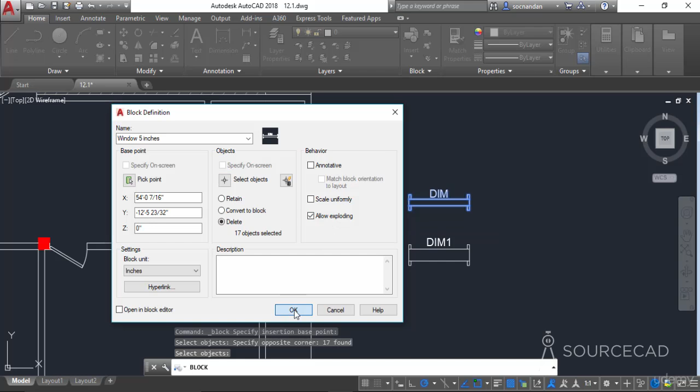Also here I'll make sure that this delete radio button is checked, because I don't want this attribute to be at this place. I want it to be removed, and I'll keep all these values at their default: annotative unchecked, scale uniformly unchecked, and allow exploding checked. Now click on OK, and we don't have that geometry anymore, but we have its copy here in this insert. So we have it added.

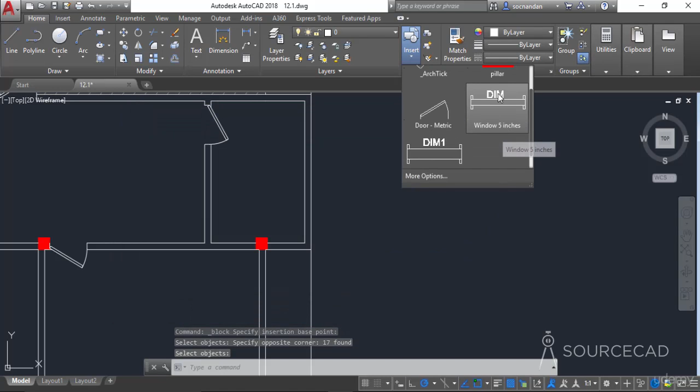Let's repeat the process for this second geometry as well. So I'll go to this create block, give it a name. So let's name it as window 10 inches. Now click on pick points and click on this pick point. Now select objects, select all of these objects, and now click on OK. So we have both of these blocks added here, the dim and dim 1, or the 5 inches and 10 inches block.

Now we'll insert both the windows in this drawing, and we have two different wall thicknesses. The first one here, the interior walls are of 5 inches and the exterior are of 10 inches. Now in order to add the windows, I'll go to this insert and I'll select the 5 inches block. Now here we have this block. Let's insert it at this point.

And as soon as you insert that block, you'll notice this edit attributes window. So that's the difference between a normal block and a block which has attributes. And here we have the prompt, enter window size and the default values, which we can change. So now we need to enter the size of this window, which we'll enter as the width by length. So let's enter 5 inches by 4 feet. So that's the dimension of this window. Click on OK. And we have that value here.

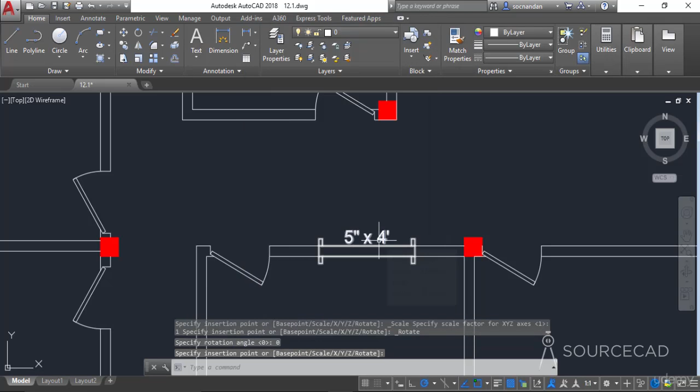Now let's repeat the process for another window here. So I'll click on this insert, select the 5 inches window, and this time I'll select this point, and now once again change its value. So I'll type 5 inches by 3 feet and click on OK. So in this way, the single block can be used to enter different values using attributes.

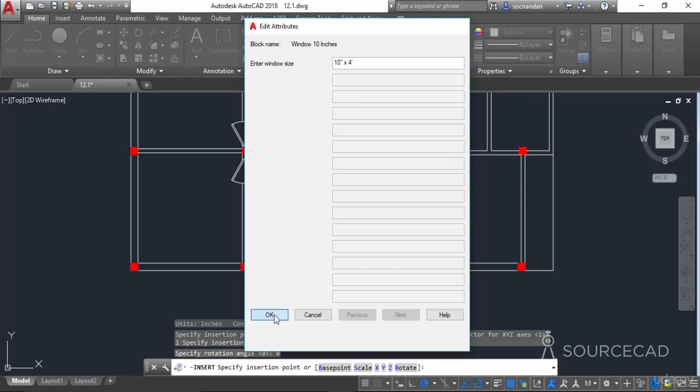Similarly, you can insert the second block also. So I'll select this 10 inches window and I'll insert it somewhere over here. And once again, I'll enter the value. So I'll type 10 inches by 4 feet. And now click on OK. And here we have it. In a similar way, you can add as many windows as you want in this drawing, and they will be added with their respective attribute values.

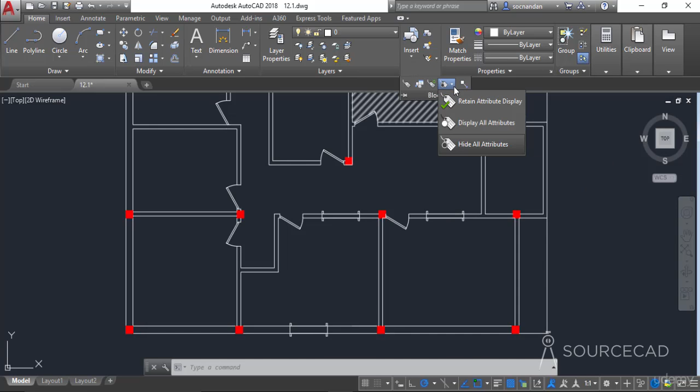Now in this case, if you don't want the attributes to be visible in the drawing, you can simply hide their visibility using this block panel. So expand the block panel, and here on the expanded block panel, you'll see the attribute visibility options. So here we have an option of hiding the attributes. So select hide all attributes, and all of the attributes will be hidden. They are still present in the drawing, and you can bring them back simply by going to the respective option. So you can select this retain attribute display and they'll be brought back to the drawing.

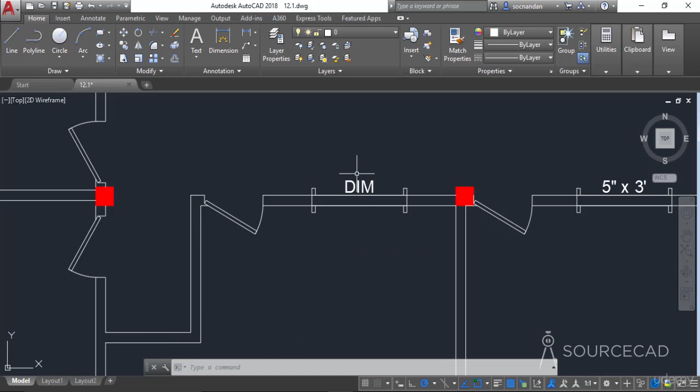Now in the previous video, I have already mentioned that when you explode a block, it will return back to its respective geometries. Now if you explode a block containing attribute, it will explode, but it will return back to its original tag values. For example, here we have this window. Let's explode it. And to explode it, I'll select X as the command, press enter. Now select the object and press enter again. And now here the attribute value changed, and it's now showing the default tag value, which was dim. And that was the original condition of the block before we converted it into a simple block. Now we have this attribute and also these simple geometries.

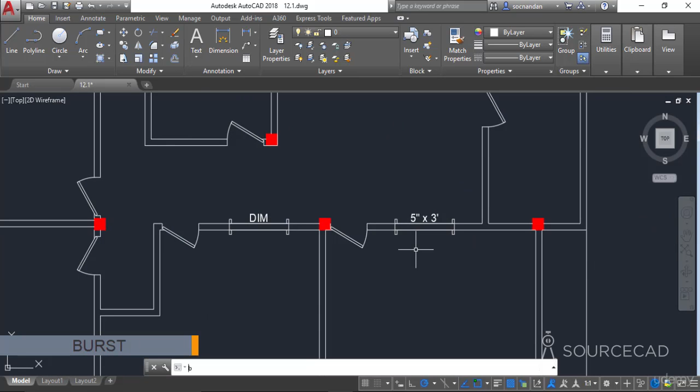But if you want to retain the attribute information even after exploding the blocks, then you can use the burst express tool or the burst command. So instead of exploding it, select burst, press enter, and now select the block and press enter again. So in this case also, the block has been exploded. You can see their respective geometries, but the attribute definition or the attribute value has been retained in this case. And this is no longer an attribute value. This is simply a text. So this was all about creating simple attributes and inserting them in our drawing.